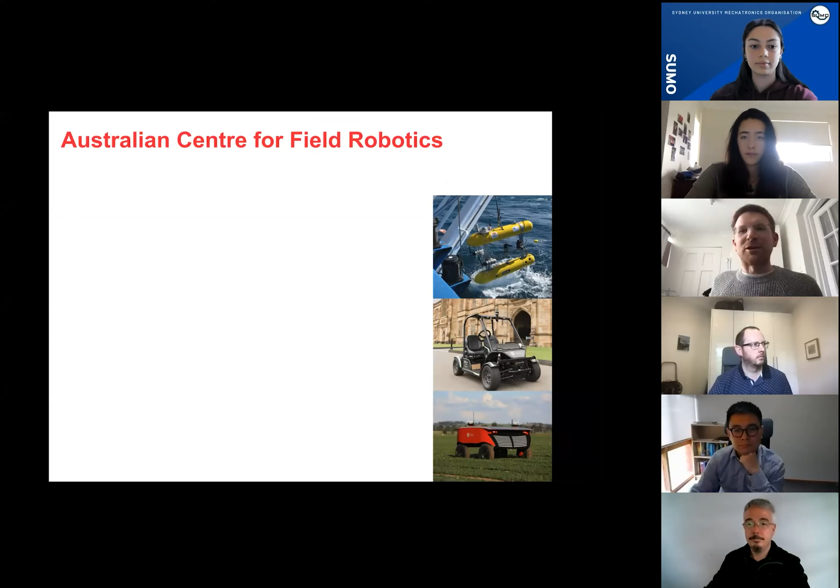Everybody here's probably heard of the Australian Centre for Field Robotics, the ACFR, where in some sense we can think of ourselves as the research arm of the Sydney University Mechatronics program. If you're a student enrolled in mechatronics, sometimes we think of the undergraduate mechatronics engineering program as the teaching arm of the ACFR, depending on which way you're looking. We're basically one of the largest robotics research groups in the world, globally one of the biggest - a really exciting place to be here in Sydney.

When we talk about field robotics, we're really talking about robotic systems designed to operate out in the field, so we do a lot of work in harsh environments. We've got a team that does marine robotics, a lot of work in autonomous driving, robotic systems for agriculture and mining, and lots of other harsh environments where we're deploying real robotic systems. We've been around for quite a long time - we celebrated our 20-year anniversary, I think a couple of years back now.

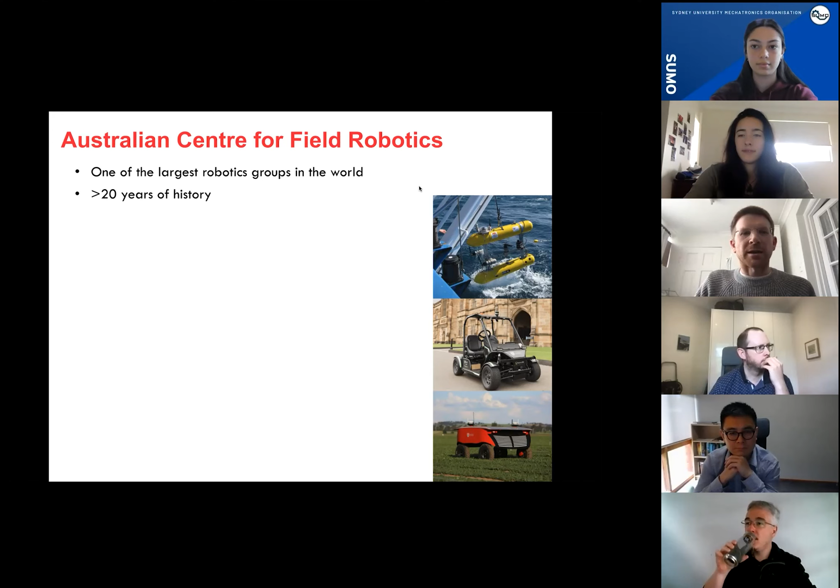We've got quite a large budget in terms of funding coming in from research funders, from industrial research projects, and also research grants. A large portion of our annual budget comes from our partners in different industries in which we're deploying robotic systems and applications, so we do a lot of work closely with real applications.

We've got around 130 research staff when you count up everyone involved in the centre. About 10 academic staff, who are mainly the types of academics you'll see in the classrooms teaching different subjects as part of the mechatronics program. About 40 research fellows dedicated to performing research, about 30 PhD students doing their doctoral research degrees, and a team of about 35 technical staff supporting the industrial projects, building and operating the robotic systems we work on in our research projects. We've also got a large number of affiliates and visitors associated with the centre.

We've got 3 dedicated campus buildings plus a farm where we operate robots - offices, field labs, workshops, an underwater test tank, and an optics imaging lab as part of our systems here at the university. We also have a farm in Marulan, which is around a 2-hour drive south of Sydney.

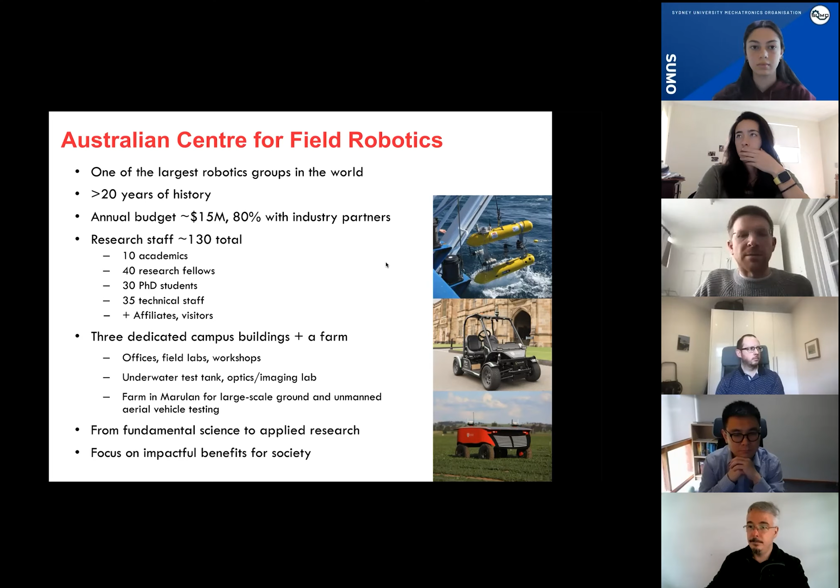We do a lot of work, everything from fundamental science in autonomy and robotic platforms all the way up to applied research projects. There's a real focus in the research on having an impact that benefits society from different automation and robotic solutions.

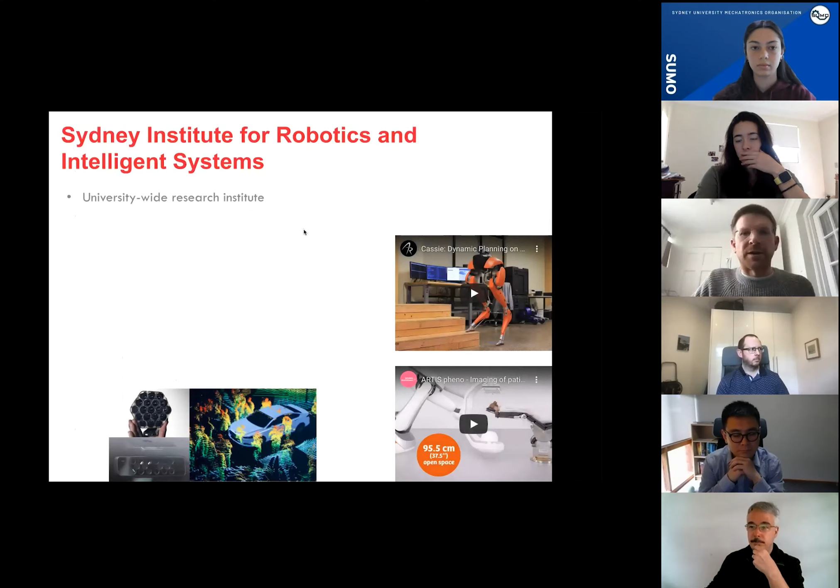Another related research group as part of the ACFR is the Sydney Institute for Robotics and Intelligent Systems, which is a superset of the ACFR, a university-wide research institute looking a bit beyond field robotics, which is the main bread and butter of the ACFR. So moving into systems such as how robots interact in society and other human-built environments, looking at applications like robotics in medical environments, medical robotic systems, robotic surgery, robotics for healthcare and well-being, human-robot interaction, and all of the sociological factors.

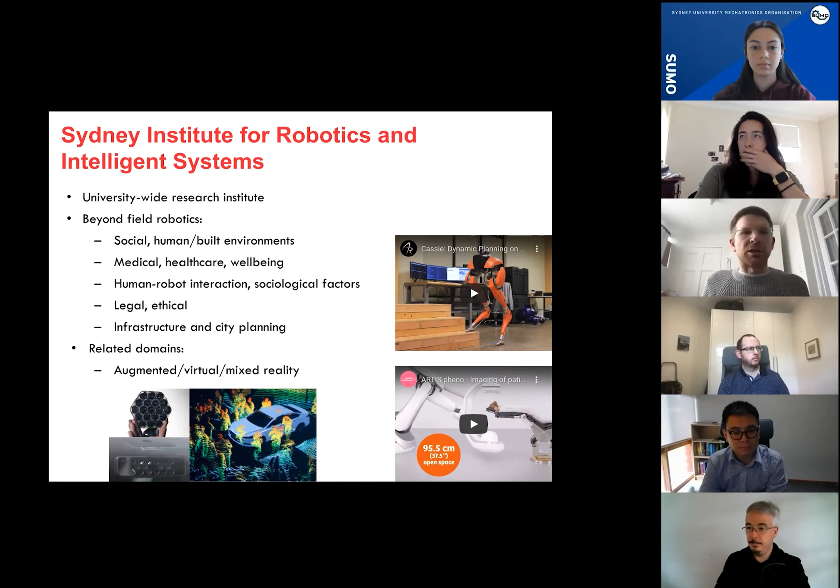We also have people associated with SIRIS, who look at things like the legal frameworks behind integrating robotic systems into everyday environments, and some of the ethical considerations behind large scale automation of things that in the past humans have mainly been involved in doing. A lot of stuff in infrastructure and city planning, and related domains like augmented, virtual, and mixed reality. So SIRIS is a larger group that encompasses the ACFR and a lot of other researchers across the university who might not traditionally be involved in pure robotic research.

We're just going to talk a little bit about some of the projects we've done in the past. This is one of the early projects the ACFR did around 25 years ago: the development of an autonomous straddle carrier system.

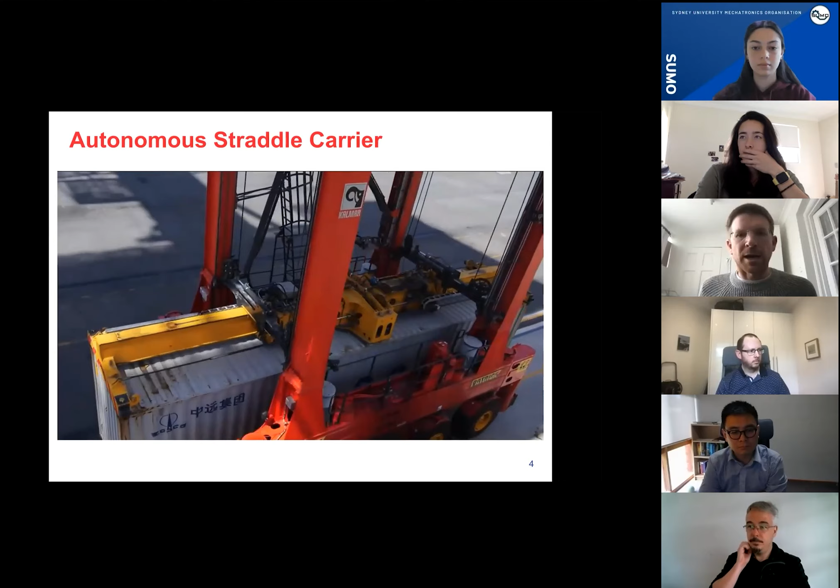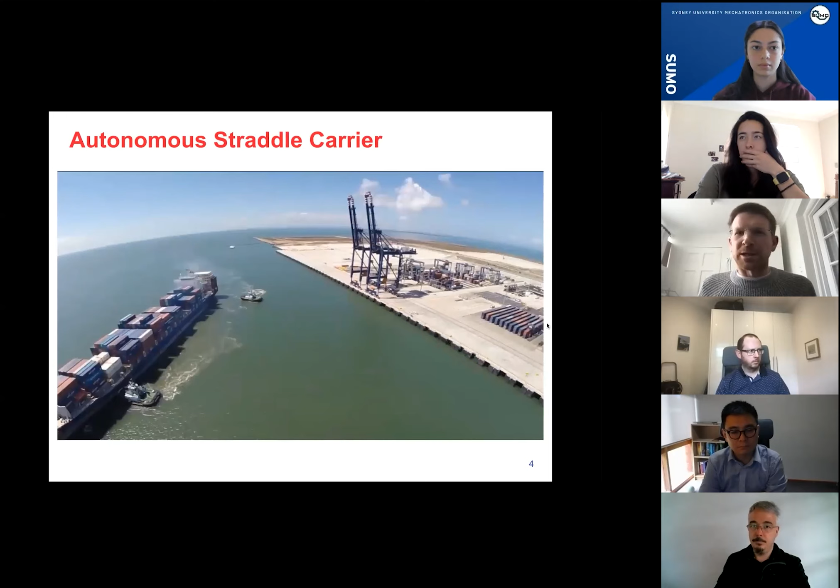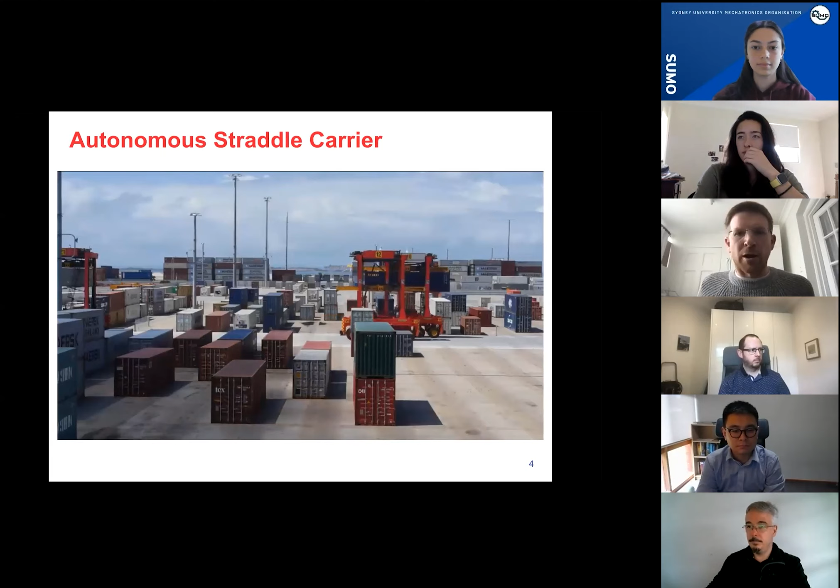We had a project, probably started about 25 years ago, maybe a bit earlier, that looked at trying to automate one of these things. So equipping it with a bunch of sensors, LiDAR, radar, vision sensors, and automated control algorithms that would allow these things to drive themselves around in a safe way.

These are really big platforms. When human operators of these platforms make mistakes, there's potential for a lot of damage, and these can be quite dangerous. So it's a difficult task to figure out how to automate these, even though they work in a relatively controlled environment.

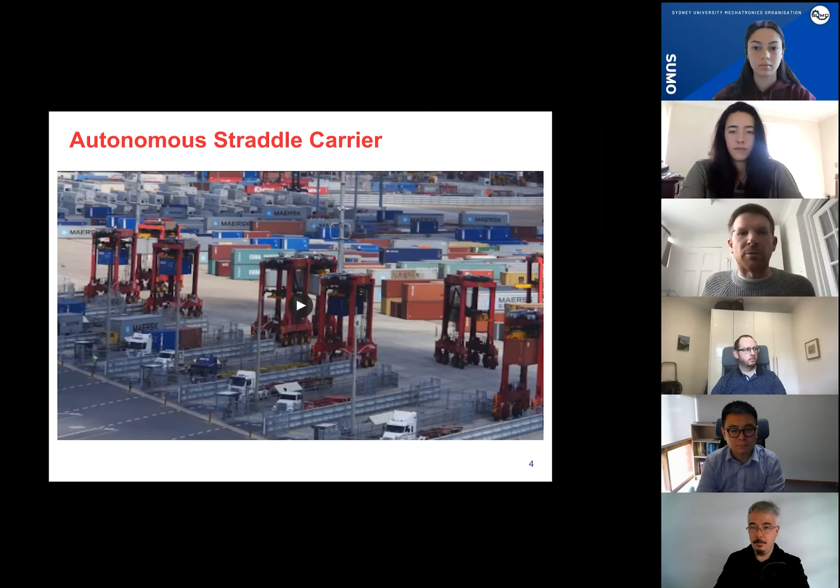This is one of the early projects we had. These systems have actually been running for about 15 years now. There's a container handling facility in Brisbane that's completely automated using these systems. They're driven around 24 hours a day, with a control station monitoring how things are going from a remote facility that can operate outside of Brisbane. So these are real applications of robotic systems that's come from some of the research at the ACFR.

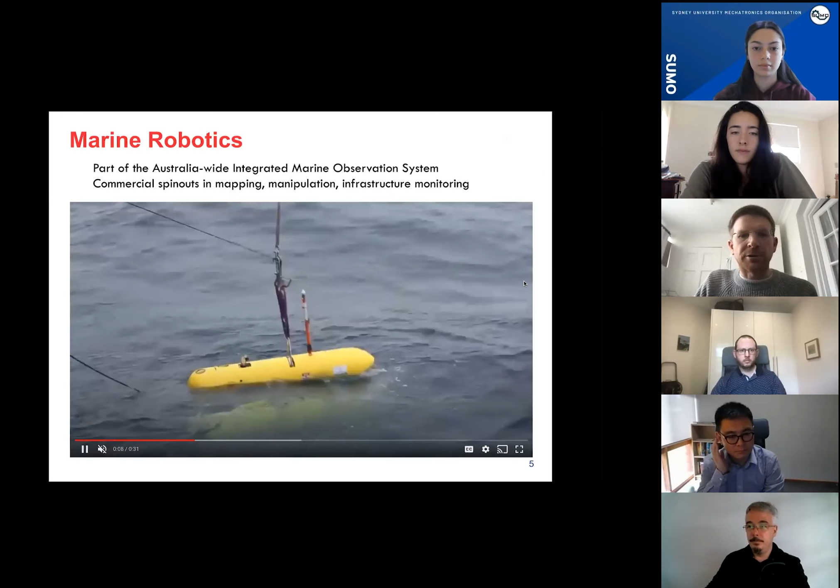We've got a pretty big marine robotics group. This is our marine robotics group deploying our Sirius AUV. It's a 200 kilogram, about 2 meter sized platform that can go under the ocean, with a whole sensor suite for imaging through the water and also seeing things on the bottom of the seafloor.

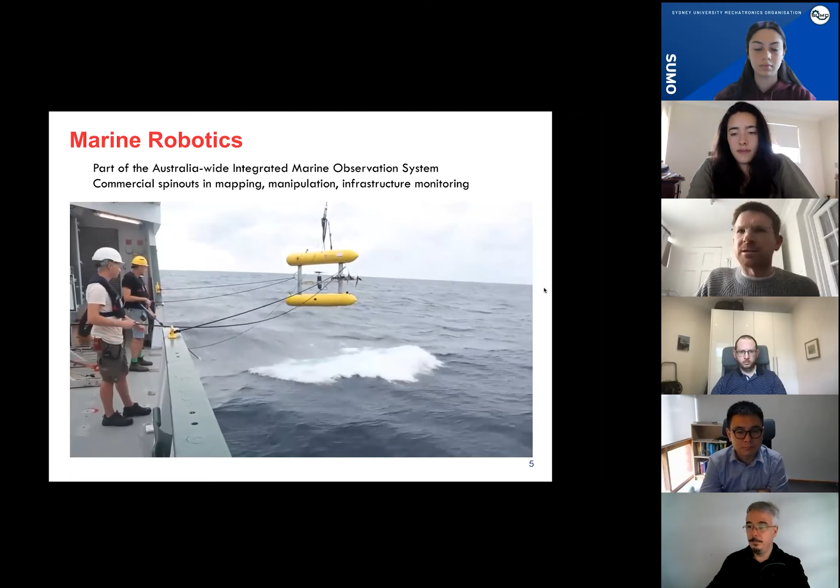This is used in lots of different applications. We've had this platform since about 2007, and it's been doing repeated observations of marine habitats all around Australia for a large time now. It's used for repeated monitoring, and in applications such as marine archaeology, studying environments where it's too deep or dangerous to get divers down to.

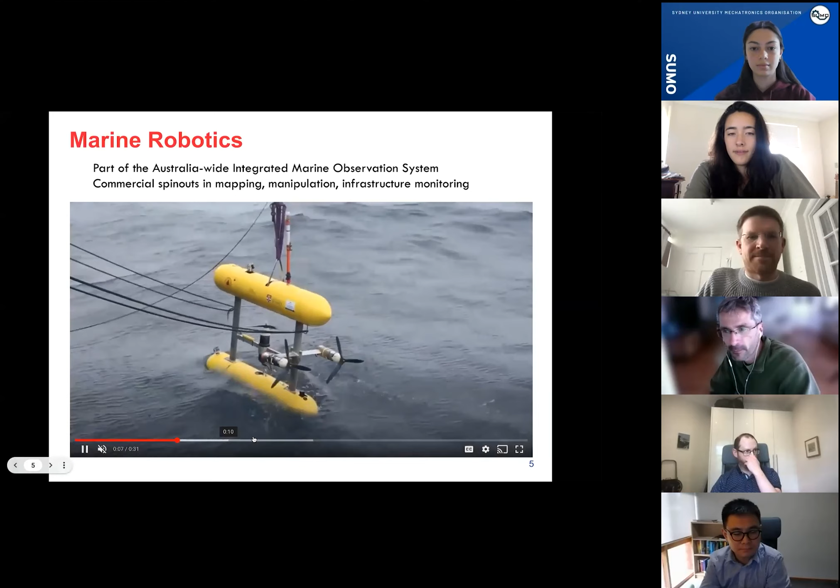I'll just point out that the video you're seeing at the moment with the AUV in frame was actually done in Greece, offshore of an island called Antikythera, looking at a shipwreck from 83 BC. So we do get to get around and see some pretty exciting parts of the world through this program.

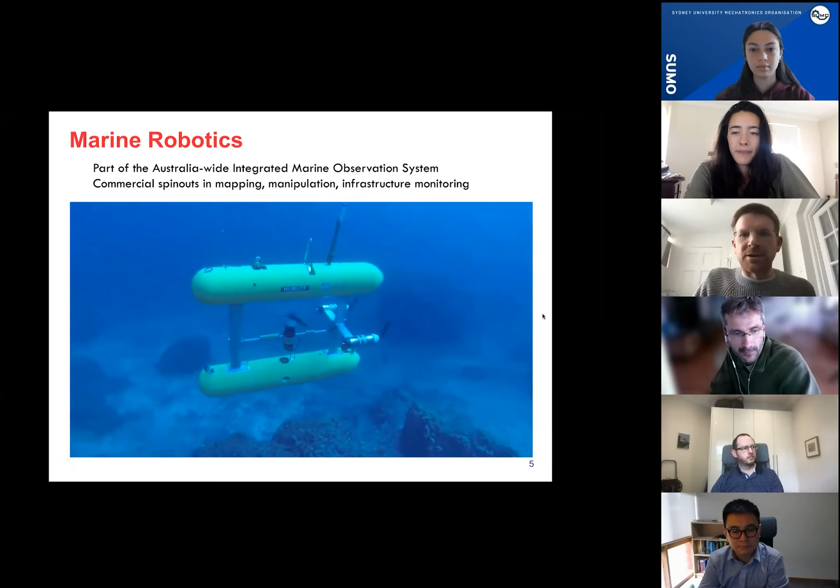Steph leads the marine robotics group in the ACFR, and this is one of those really interesting applications. Steph can maybe talk a little bit about some of that work if anyone has any questions.

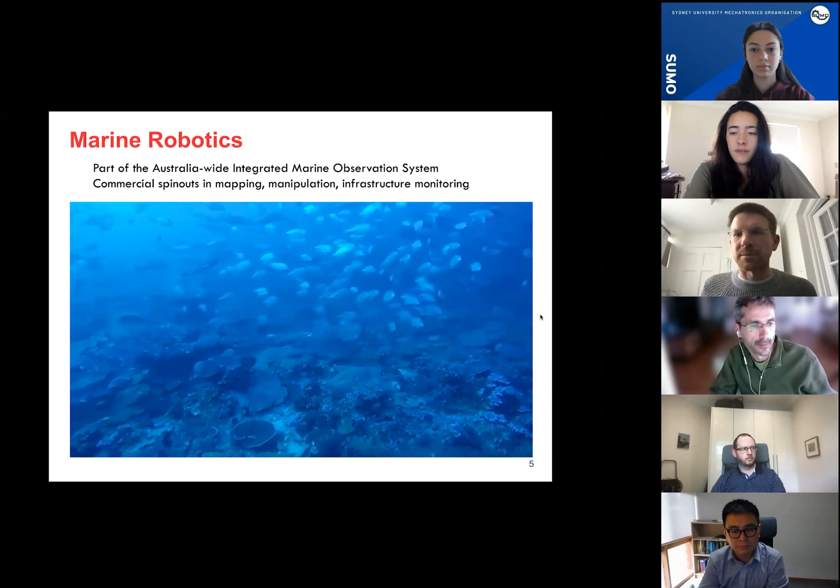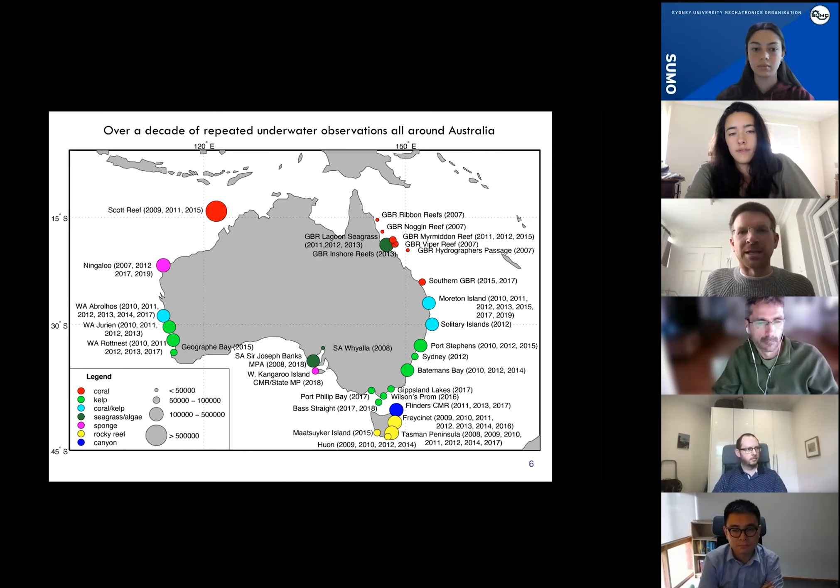The program works closely with marine ecologists and other marine scientists to use these robotic technologies to measure habitats that they've never really had an effective means of measuring. You've probably heard people talk about the ocean floor as the final frontier - there are parts of our ocean floor we know less about than we know about the surfaces of other planets seen from space probes. So this is a really exciting area for robotics.

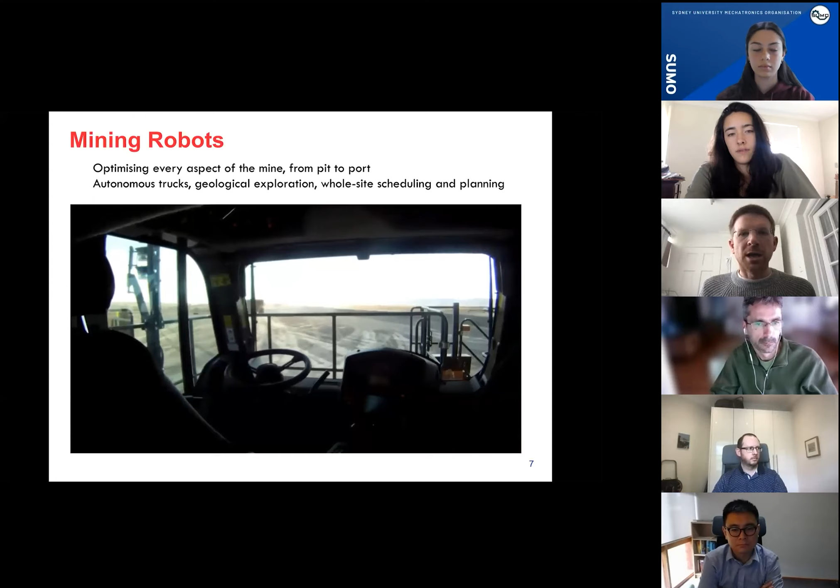We've got a group that looks at using robotic systems for mining. In fact, we've got a really large research group known as the Rio Tinto Centre for Mining Automation, which started as a spin-off out of the Australian Centre for Field Robotics. They look at things like autonomous operation of haul trucks, autonomous systems for geological exploration, and planning and scheduling operations using these massive vehicles over a mine site, along with all the implications of safely operating them and ensuring people's safety on a mine site.

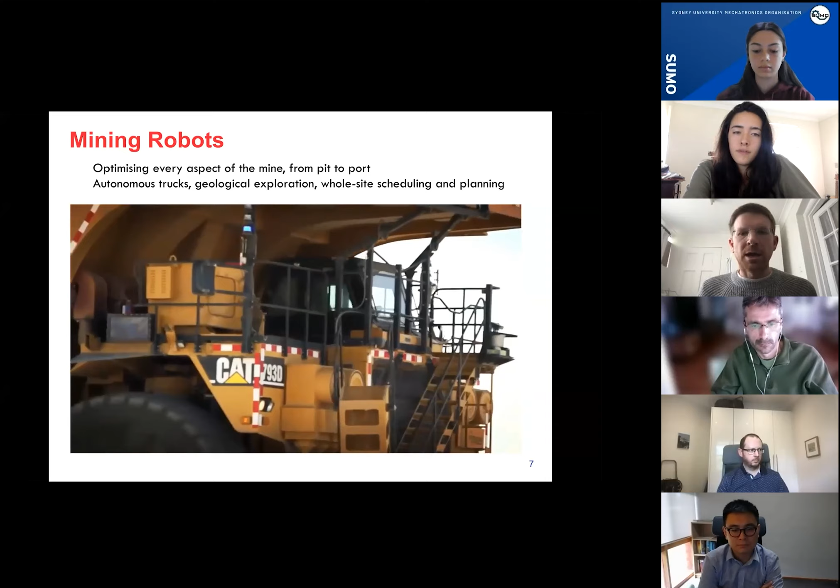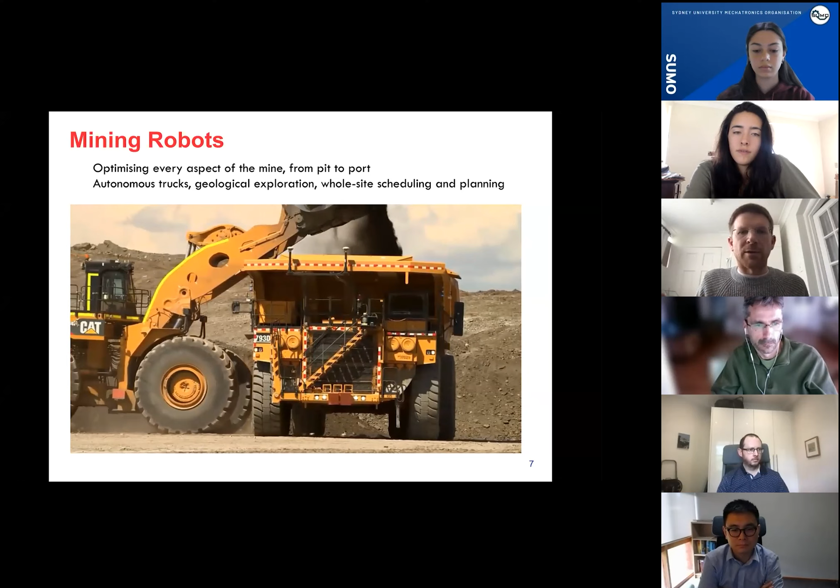You can imagine driving these haul trucks - it's very difficult to see what's around you. So you need systems built up with networks of sensors to work out where people are on the site and make sure they're not in harm's way as you're operating these vehicles.

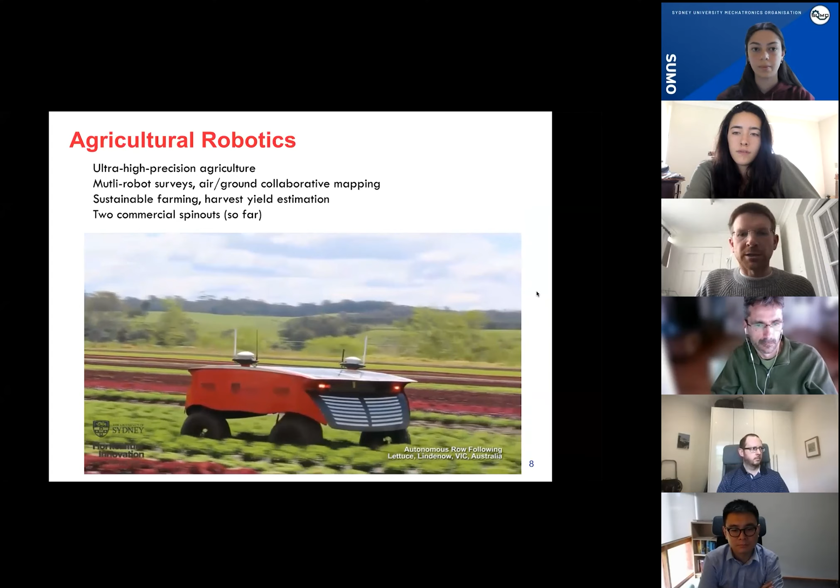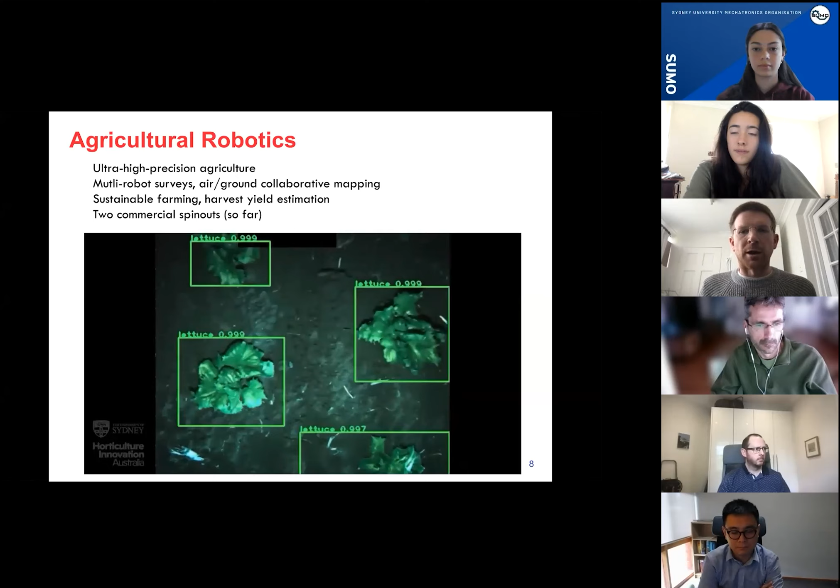We've got a group that looks at building agricultural robotics. This is a RIPPA platform, used for autonomous sensing of crop rows, and able to manipulate what's going on in those rows by doing things like weeding and applying fertilizer - a complete automated solution to what a farmer would do on a crop row.

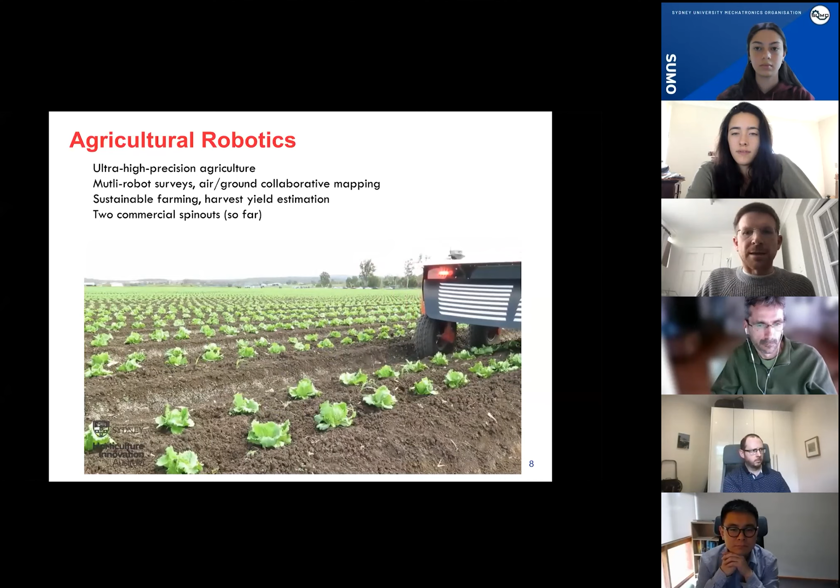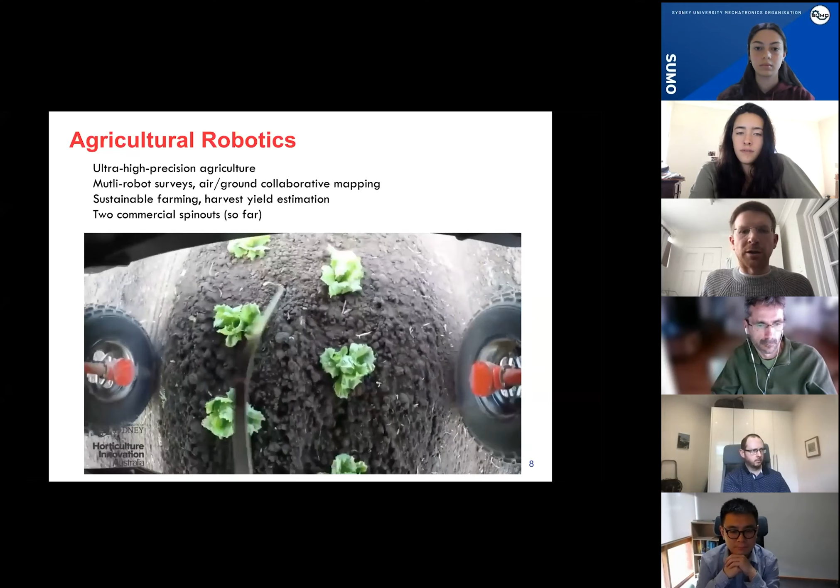This platform has a bunch of sensors on board for mapping the health of different types of crops. This is an example of an autonomous weeding system, a mechanical weeder actually scrubbing out here in the dirt when it detects weeds - having autonomous systems for detecting where crops and weeds are, and removing the weeds in what would otherwise be a really manually intensive process for farmers.

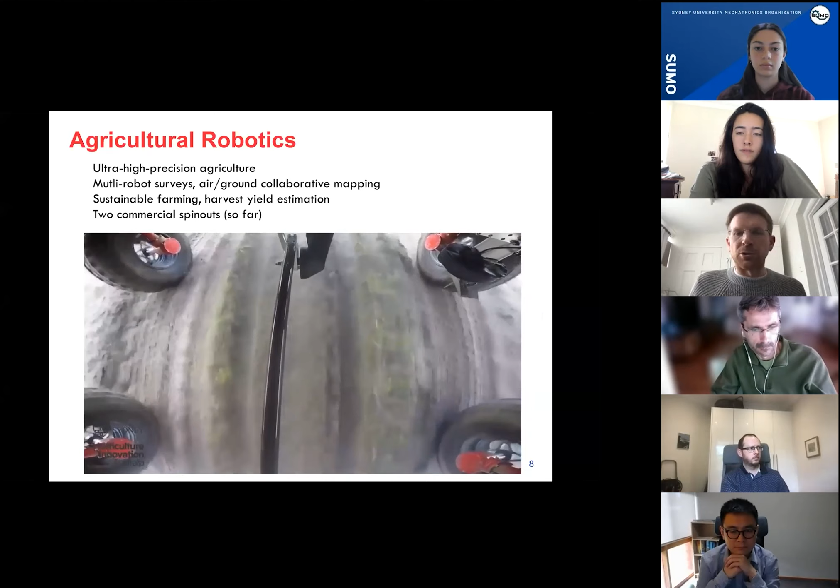This is an example of using a soil-based sensor for measuring soil properties, building maps to understand nutrients in the soil, and having a completely automated solution to growing crops in the future.

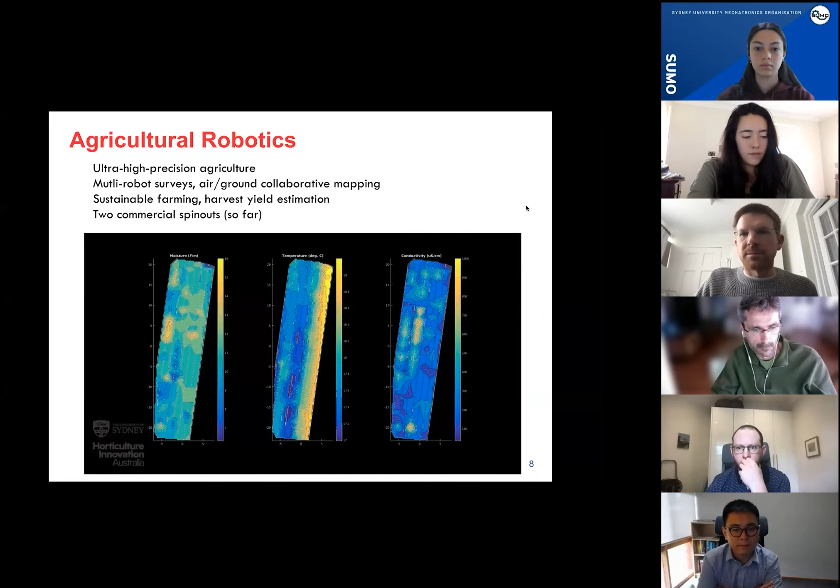We have a couple of commercial spin-offs that have come out of this research. Agerris is a big agricultural robotics group that's come out of it. We've got another spin-off that's been looking at more tree crop applications, such as macadamias and apples, using autonomous robotic platforms.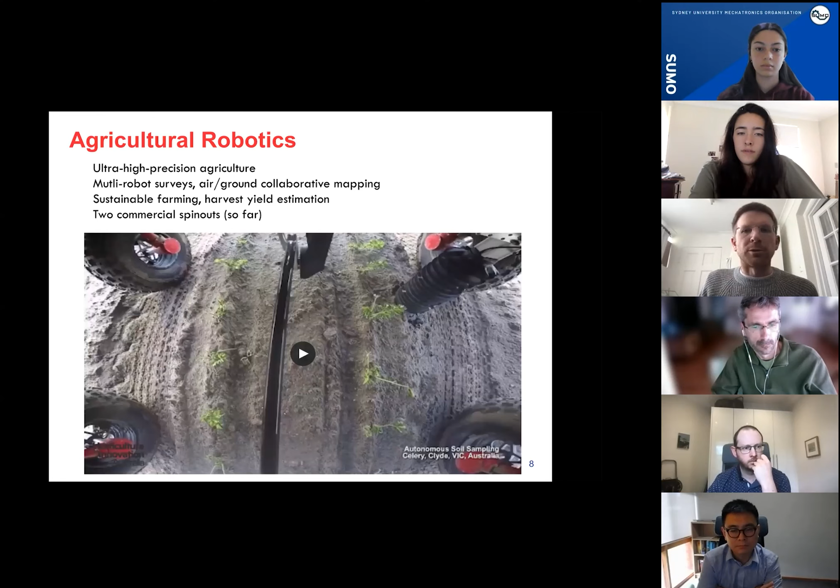This is some work from our robotic imaging group - I might hand over to Don if he wanted to say a few words about it.

Yeah, absolutely. As we're looking at these different platforms doing amazing things in challenging environments, one of the problems we run into is how we can let these robots sense their environments reliably and repeatably, so they do the same thing every time. The application domains are really wherever normal cameras aren't doing the job, and you discover pretty quickly how broad that is - some of our recent work is in underwater robotics, but also vision for the blind.

We're working on a project designed to help the visually impaired sense their environment by putting sensor suites on a pair of glasses to look out into the world, then relay what they're sensing to the user through an audio display. More exotically, we've been doing some work on figuring out how we can sense reliably in extraterrestrial environments, including work to go to the moon and endow robots there with special capabilities, especially around polar exploration, to sense reliably.

Just the very fundamental problem is that if there are clear things around, that tends to break vision. This is showing off some of our work, and you can see here a robot detecting parts of the environment that are transparent, autonomously.

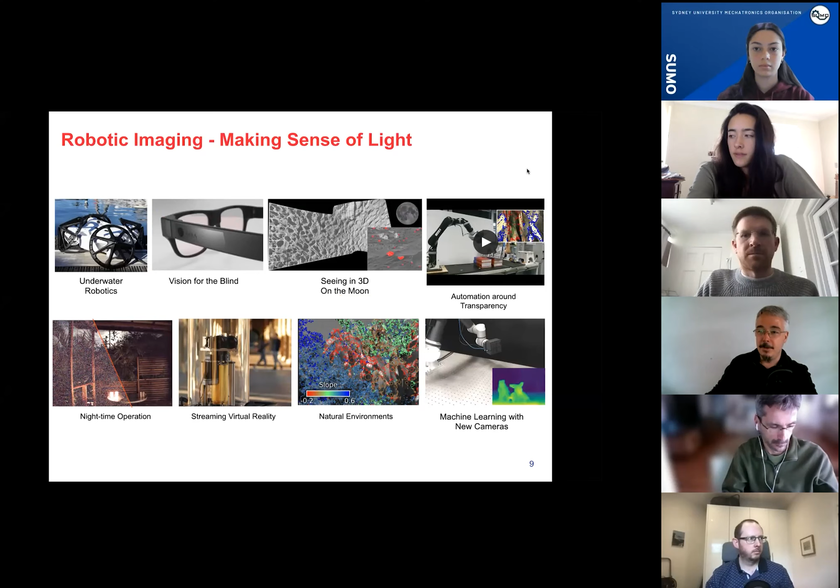So a big part of this is: let's go ahead and design the camera for the job. We know nature does this. Different animals have hit different evolutionary niches because they have different needs, and so should it be with our autonomous agents. So here are some of the cameras we're working with in the group.

We've designed and built most of these. The spherical lens camera is out of some work I did while at Stanford. EPIImaging is a startup in Silicon Valley I'm working with. And these are some open source and customizable light field cameras I've built with some students.

This is a startup out of QUT that we've built to image the backs of people's eyes using light field technology. And some recent work out of our lab with Jack Naylor, Adam Terrace, and others to build 3D hyperspectral sensing. So the future is bright.

Emerging technologies like single photon detection, Doppler LiDAR, vision on chip approaches—these all apply. And the problem, of course, is with the range of available emerging technologies, how do we adapt those to let robots do new things and operate across environments?

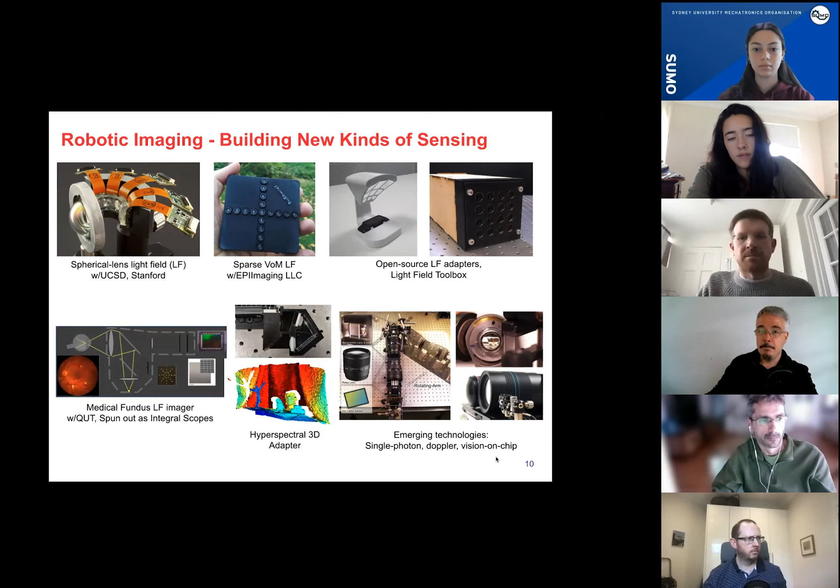So the take home there is by designing cameras for the job, you can see much, much better. And when I say much better, I mean the difference between a robot that could not really do its job, which in this case is to perceive krill, but it varies by application.

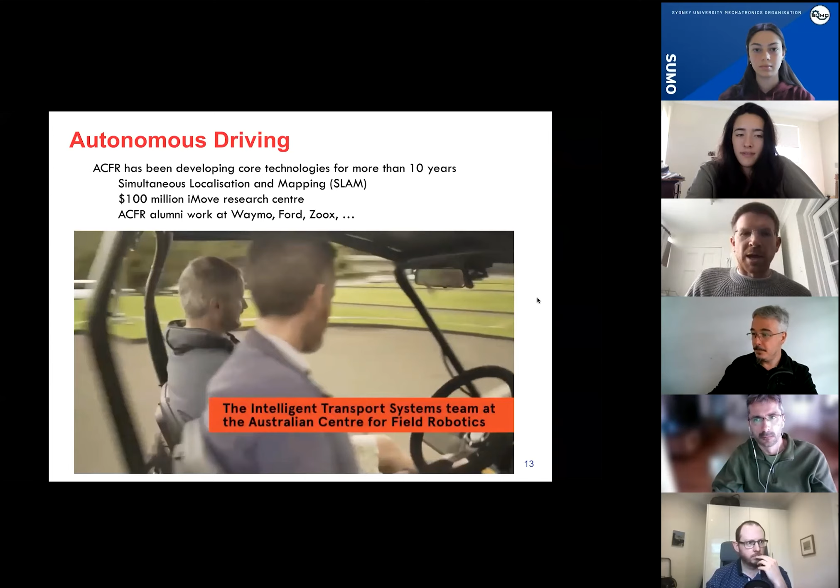But I think the next slide is very much—is Stuart here? Yeah, so this is a group that we have that involves Professor Eduardo Nebot and Dr. Stewart Worrall, who actually gave a talk to this group a couple of weeks ago and probably went into a little bit more detail about this.

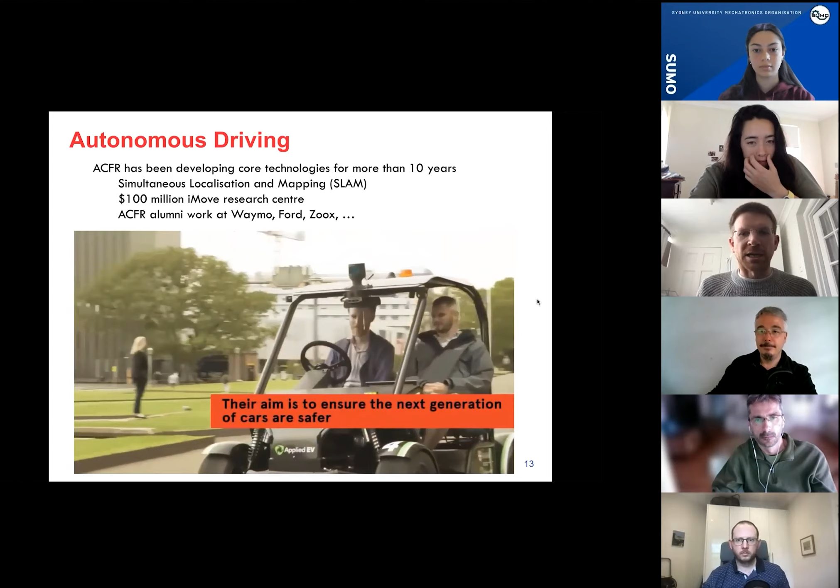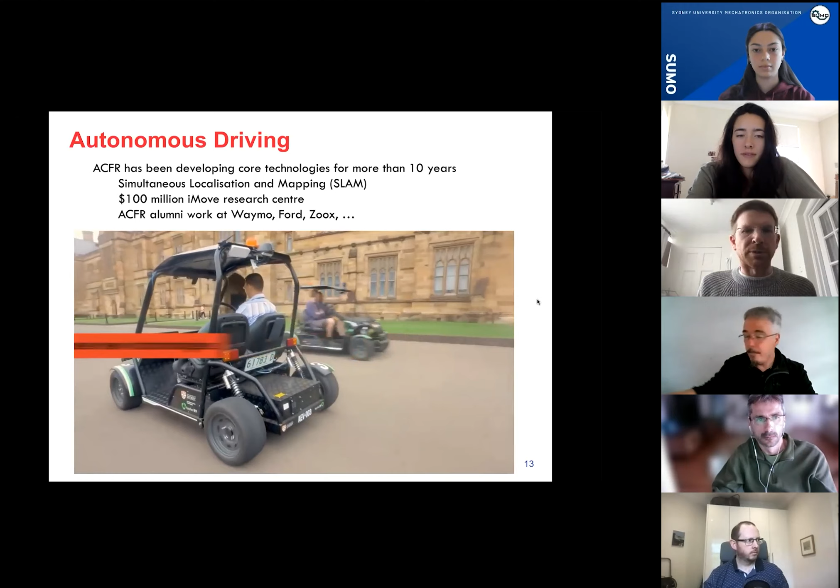So we've got a group that looks at autonomous driving and some of the core technologies involved in the tasks, such as controlling vehicles and the perception of the environment around you—seeing pedestrians, understanding what their intentions are going to be, and understanding how to obey all the road rules and all the interaction that happens between cars in these kind of busy environments.

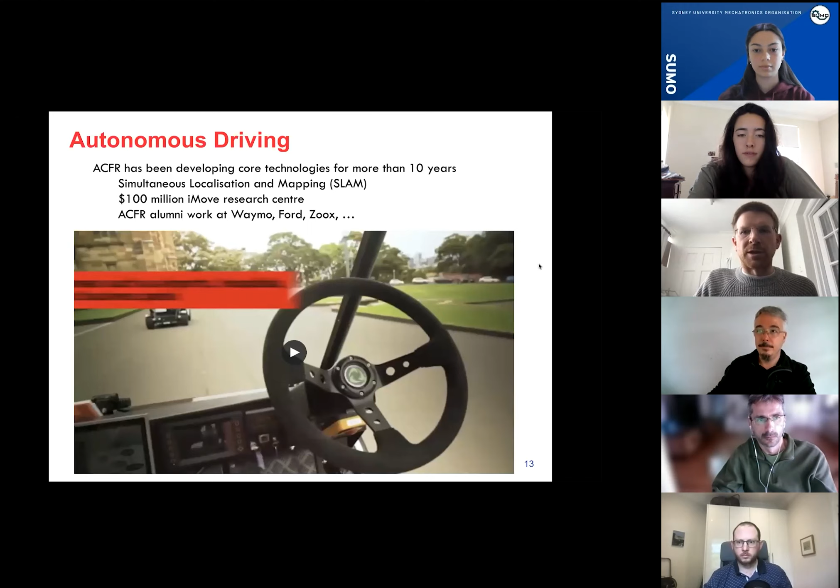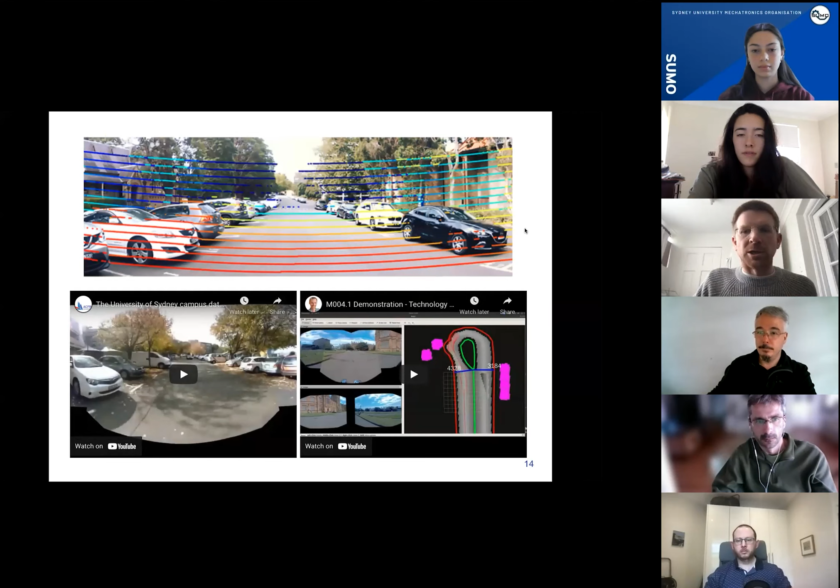This is a really big area of robotics that's going to be really important over the next decade. These are some of the works that have gone in here, which I can come back to, and probably Stuart went into a little bit more detail in terms of perceiving what's in the environment.

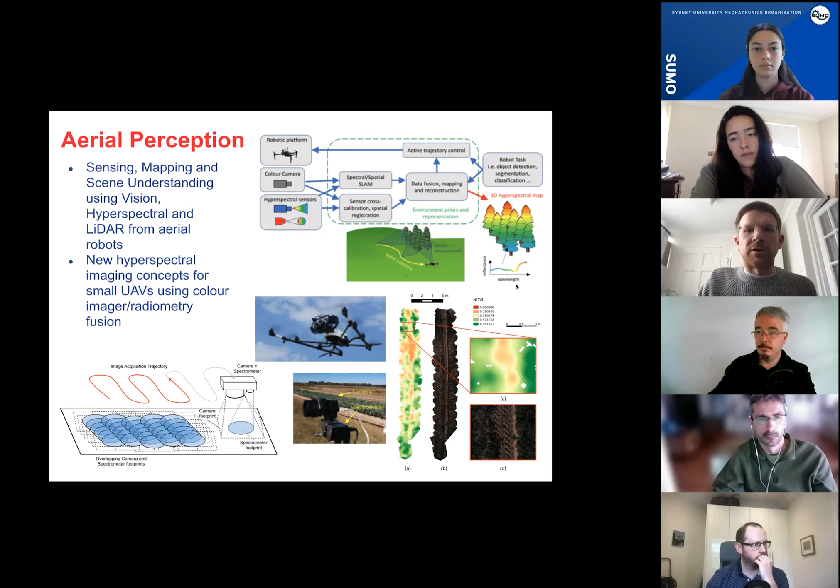We've got a group that looks at aerial perception, so autonomous aerial vehicles, a lot of work involving sensing, mapping, and scene understanding using vision sensors, hyperspectral imaging sensors, and laser scanning from aerial platforms, trying to develop low cost and cost-effective imaging technology so that drones can go out there and collect information in a range of different environments, such as in agriculture and forestry.

We have a research group that focuses specifically on forestry remote sensing and robotics. A lot of this is using drones and other aerial vehicles to scan forest environments, which have a number of unique challenges in terms of the structure of the environment. This has applications such as the future of our commercial and native forest health, doing things like looking at commercial operations, tracking forest health, and managing forest fires.

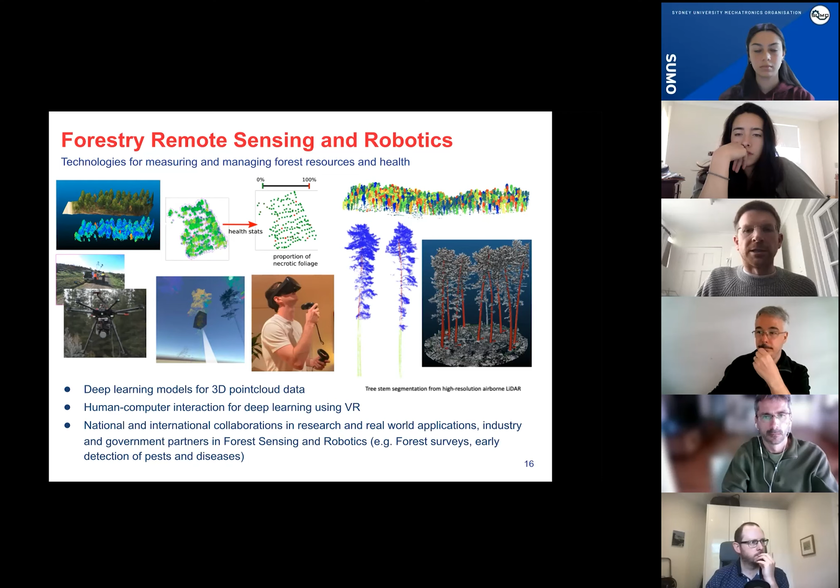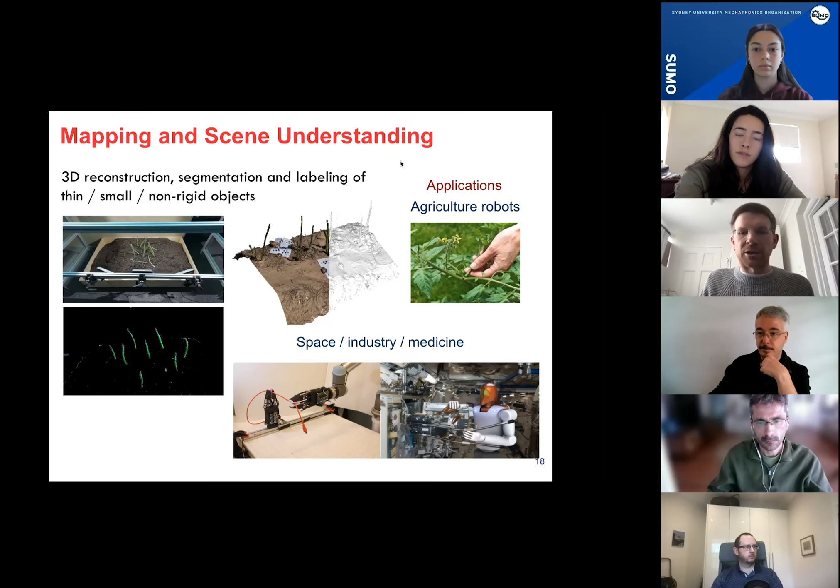We've got groups that are kind of spin-offs from doing mapping, sensing, and reconstruction of three-dimensional aspects of the environment in difficult scenarios, where you've got small objects, thin objects, objects which are non-rigid and can move around and morph as you're trying to image them, and all of the sensor processing and perceptual understanding that goes into getting robots to make sense of those environments.

We've got a group that's looking at robotic control - this is Guodong Shi and Ian Manchester and others in the group looking at a range of research topics around the control of robotic systems. This is the Cassie walking robot platform, which is something that we now have as part of ACFR and SIRIS, and I think Ian could maybe tell us more about this.

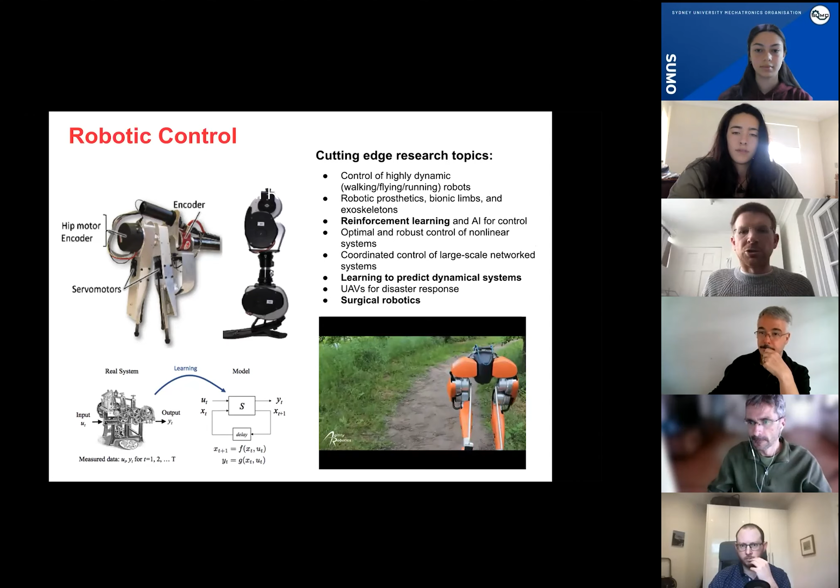So, looking at how we develop algorithms to control these kinds of systems, which have all these issues associated with the stability of the platform under different types of walking scenarios, and how we combine perceptual systems with control, and how things like deep learning and machine learning technologies come into getting robots to learn how to control themselves.

So ACFR covers a pretty wide range of diverse research topics that we're tackling around autonomous systems, robotics, and intelligent systems. Some of the application areas we're moving into - we've got a group now with a lot of applications looking at things like space robotics, in-orbit robotics, and lunar planetary rovers. A lot more applications are starting to kick off now in medical robotic applications and robotic surgery, and these are some of the research areas we'll continue to tackle into the future.

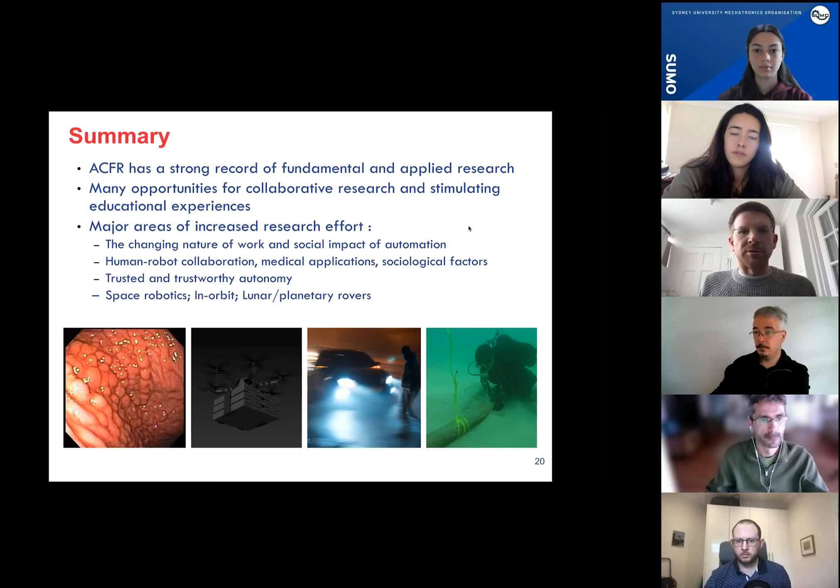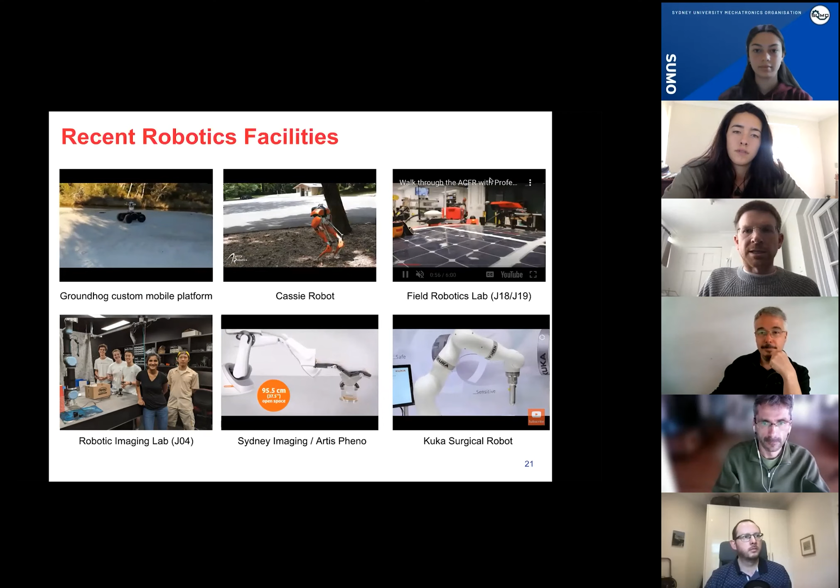I guess there's a little bit here about some of the recent robotics facilities that we've got at the moment. This is one of our new - or it's been around for a couple of years now - Groundhog, a kind of custom mobile robot platform that we can use for lots of different research along with our Cassie walking robots. This is our field robotics lab, which is located just about a 10-minute walk away from the main engineering precinct, near Abercrombie Street.

And we've got a robotics imaging lab, which is based at J04 in engineering, at the ACFR building, and a number of other robotic platforms and systems that we've recently made available as part of the ACFR.

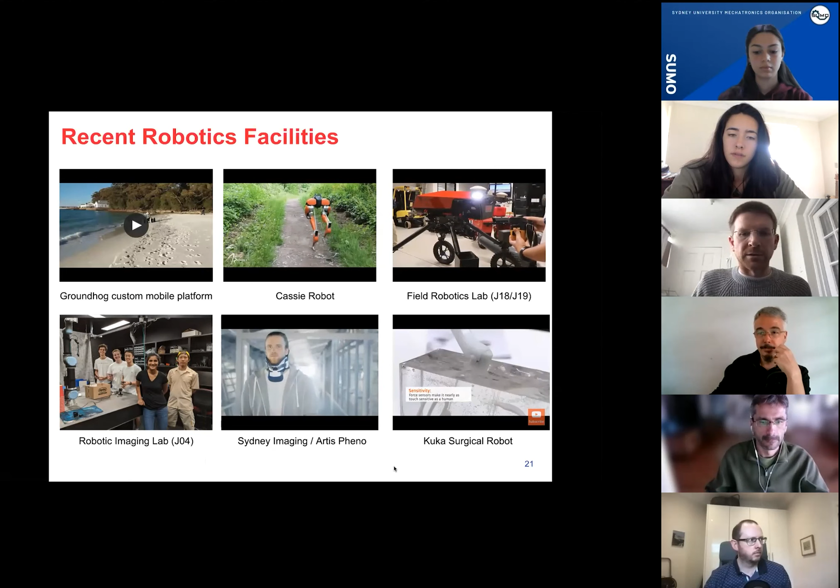I guess the last thing I wanted to talk about is, if there are any final year students here, something to consider is getting involved with research projects happening at the ACFR through postgraduate studies like masters or PhDs. Think about having 3 to 4 years to run your own research project, supported within the Australian Centre for Field Robotics, with a number of academics here you could get in contact with if you're interested.

The other thing I should mention is that every year we have a really large number of honours projects for the final year honours thesis, run across all the different research projects we've talked about today. So this is another way to get involved in the research happening at the ACFR.

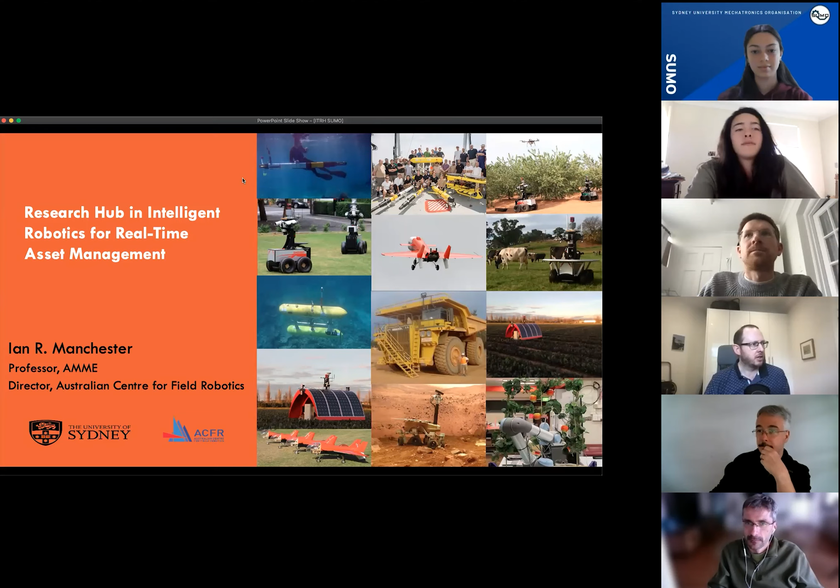The idea behind it is you think about some real physical thing existing in the world - it could be a bridge, railway, wind farm, solar farm, offshore oil platform, whatever, some big outdoor infrastructure. And you want to know what the state of it is. You want to potentially do inspections, maybe even do repairs, repainting, whatever. You want to keep it in decent shape.

The idea is that you have what's called - you might have heard the phrase, it's a bit of a buzzword at the moment - a digital twin, which is basically some kind of digital representation of the real asset, kind of like a CAD model, but it represents real-time information of what the current state is. So the question is, how do you keep it real-time? How do you keep updating it if the asset changes, if something breaks or needs repair or wears away over time?

So basically we've proposed, and what we'll be working on, is robotic systems for doing this. You break this down into using the digital twin to figure out where the robot should go - think about quadrotor drones inspecting wind farms, marine robots like some you saw earlier looking at undersea infrastructure. You use the digital twin to plan where the robot will go, then execute a mission - it might need to get very close to some underwater pillar in strong currents, so you need really good...

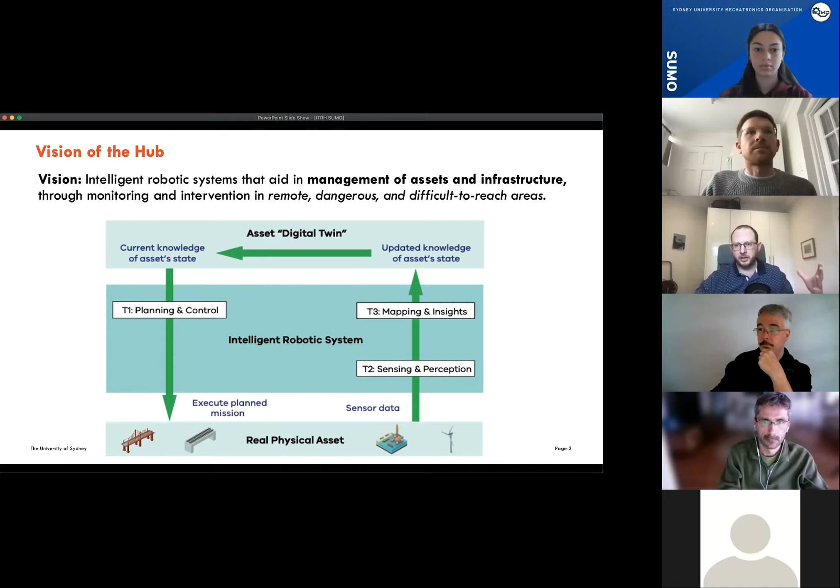So basically you've got a real thing out in the world - think about a wind turbine. You want to keep some digital representation of it, keep it live and up to date so you can track what's happening. The robotic system will be planning a mission about where the quadrotor should fly around that wind turbine, then you've got to execute the mission, so you need really good flight control systems, good collision avoidance and so on.

And then you have various sensors on board - we've got people like Don, for example, who work on sensor systems - and you'll be inspecting, maybe analyzing what's going on, and building that into some big map, which might even be a spatiotemporal representation of how the thing in the world is changing over time. And you use that to update the digital twin.

And then there's this continuous loop of continually updating, planning, perceiving, and so on. And then eventually maybe also robotic intervention, maintenance, and so on.

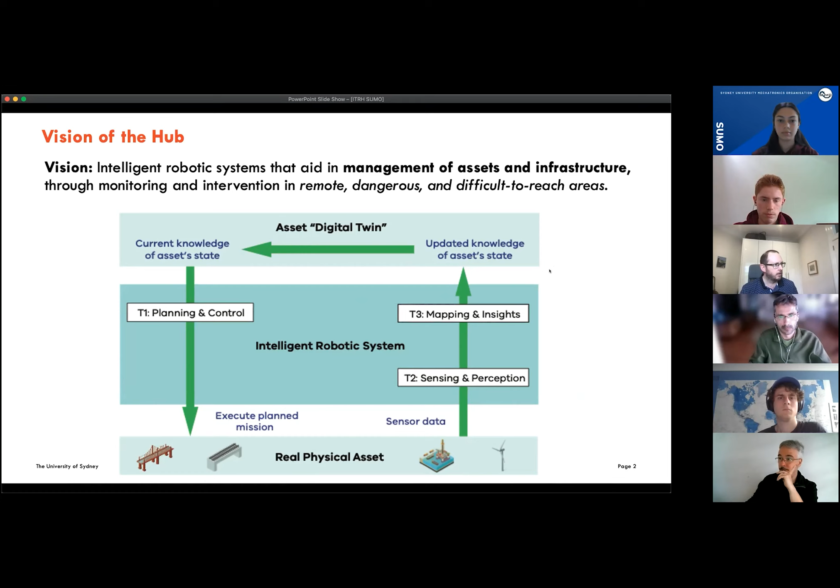There's a bunch of people involved in this, not just at Sydney Uni. We're leading it, and a lot of this is the academic team involved. You'll see that most of them are USyd, but we also have people from QUT, which is another one of the big robotics groups in Australia, and a few from ANU who have a very strong team looking at computational methods for planning.

The way that we've broken it down is we've got 3 fundamental research themes: planning and control, sensing and perception, and mapping and insight. These are the basic science of robotics that feeds into these kinds of capabilities.

Then we've got a program of translating that into industry impact, involving some capability demonstrators. This would be things like the DARPA Grand Challenge style thing. You might have seen the Subterranean Challenge a few weeks ago, that kind of event where we're showing off robotics capability, and then a program of actually getting this out into industry, cutting across those fundamental research themes and the translation-to-impact programs.

We've singled out a few capabilities that we really think are where robotics needs to advance. One is mission planning for information gathering. We've got navigation and control in challenging conditions, active perception and manipulation, and spatiotemporal mapping and change detection. These are the new thrusts coming from this research program.

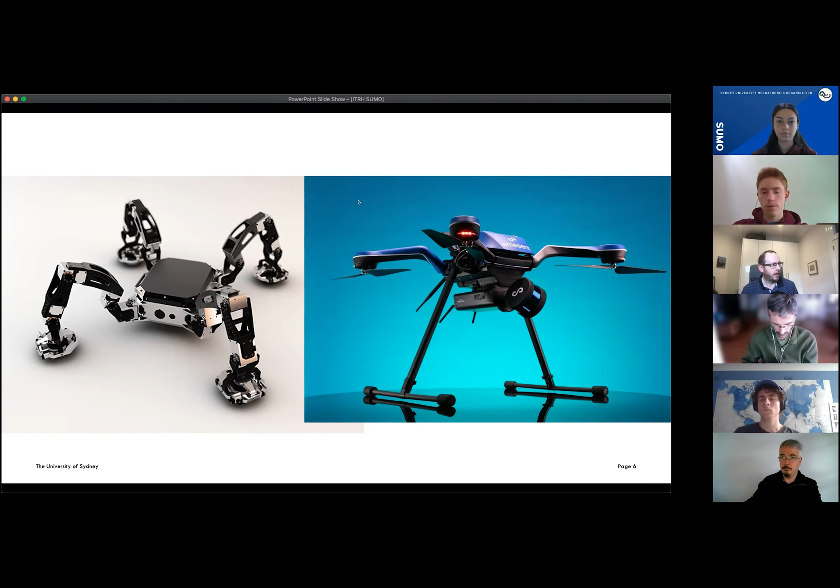That's pretty cool. We've got a few companies that look at this digital 3D reconstruction, digital twin representations and so on. One company, Abyss, is a spin-off company from the ACFR - some of our former PhD students went off. They do marine robotics, but they also do 3D imaging and reconstruction of marine infrastructure, looking at things like real-time damage assessment in complex infrastructure systems.

And then another company called Nearmap, which is a Sydney-based company but has really got global reach now. Think of this as super high resolution and high frequency updated Google Maps. They build 3D high-res maps of things, and they revisit places several times a year so it's really up to date. Then they have layers on top of that of machine learning to provide insights. What we're working on with them is: they do aerial imaging of stuff, but if you wanted to augment that with robotic imaging closer to the ground, then that's a way they can really add a lot of fidelity to their models.

Worth mentioning also, Ian, that some of our former PhD students are there doing work on classification, and they also take a lot of ESIPs, Engineering Sydney Industry Placement Scholarship students at NearMap every year. So good opportunity if you're interested in that kind of thing.

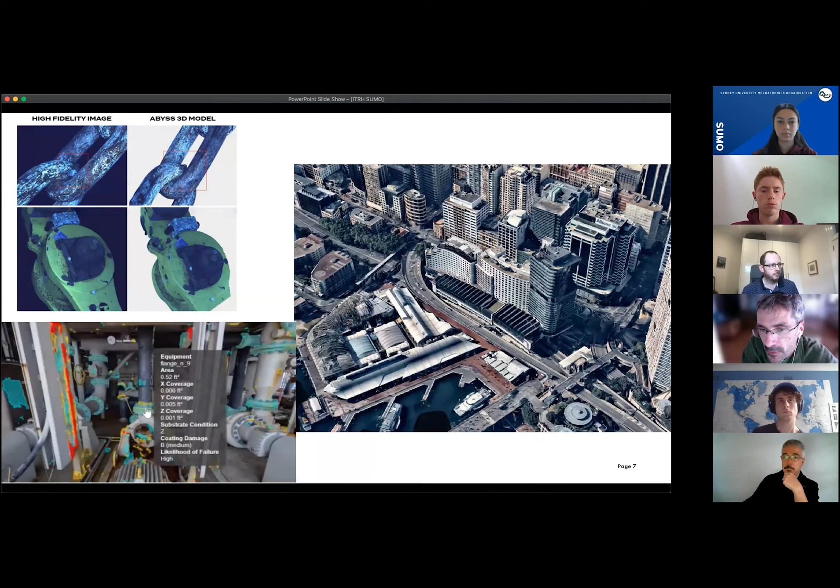So a few of the other companies involved are building things here in Sydney as well. Advanced Navigation do all sorts of things like inertial measurement systems and acoustic sensing systems. This is an acoustic sensing system they build for marine robotic systems. It can be used for things like collision avoidance, but also velocity estimation by bouncing sound waves off the seafloor. They're also developing their own marine robotic systems.

There's a company called Hullbot. They're making a new robotic system for cleaning the underside of ship hulls. Think of it a little bit like a pool cleaner robot, but it goes underneath ships and cleans the bottom of those. And then there's another company called Engine Room, which is focusing really on high performance computing, especially in kind of machine learning and data analytics.

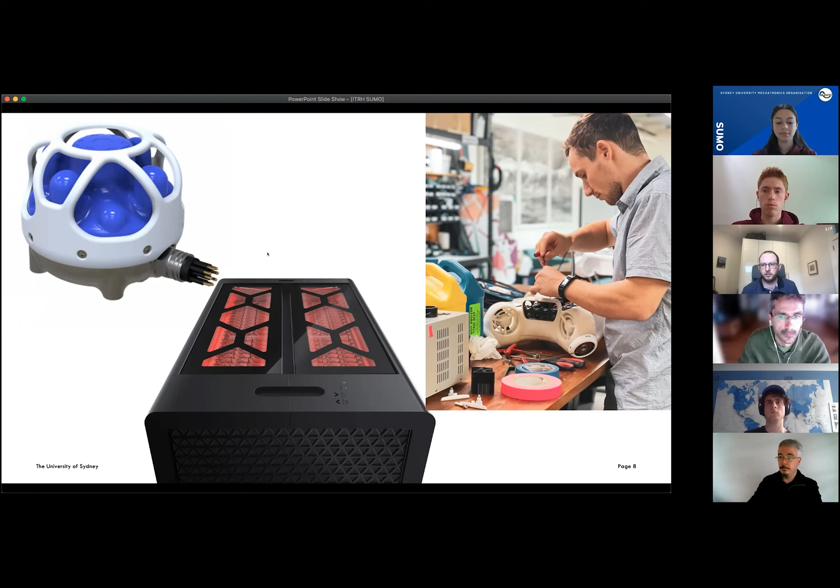Big rooms full of GPUs. But they're actually also designing and building their own custom cooling systems for those, to get extra performance out of them.

And then we've got a couple of companies or organizations that really manage really complex infrastructure. So this is the Opal nuclear reactor at ANSTO, and they're one of our partners, and they're very interested in robotics across a spectrum of applications - monitoring, maintenance, material handling, that kind of thing.

And then Thales is a partner. Thales is a large French multinational corporation, but they've got a big presence in Australia. They actually also do marine robotic systems - they have an underwater systems group that we have a long history of collaboration with. But they're also responsible for managing the Australian Navy's fleet at Garden Island, doing all the maintenance and inspections there.

So they're very interested in getting robots to fly around and crawl inside and swim around underneath, and do a lot of that before they pull the ship up, so that they're not met with nasty surprises when they actually get the boat into dry dock.

So I think the important thing here is that it's not just the academic research - we've got some really innovative and exciting companies on board with this hub as well. This is going to be launching early next year, but there's going to be loads and loads of opportunities over the next 5 years to do PhD research and masters, that kind of thing. So do get in touch with us if you're interested in that.